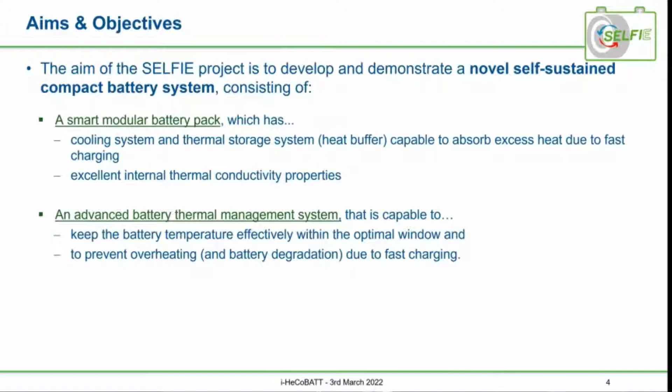So these are the aims, and the targeted results for industrialization are listed here. It has been divided into 4 parts, and there are 2 major points which are very relevant for EV growth: one is user acceptance, and second is EV market penetration. The 4 divided parts are very much related to these.

First is enabling fast charging up to 5C, which in our case will go up to 140 kilowatts of charge power, reducing the charging time to 10 minutes - that is almost 2 to 3 times faster than today for a 30 kilowatt-hour battery pack.

This will be achieved by developing a battery system capable of effectively absorbing excess heat during fast charging. This will also allow us to enable long-range driving by employing a battery pack capable of handling charging powers up to 140 kilowatts, instead of the current 50-100 kilowatt range. The target is to have a long range in terms of 700 to 1,000 kilometers.

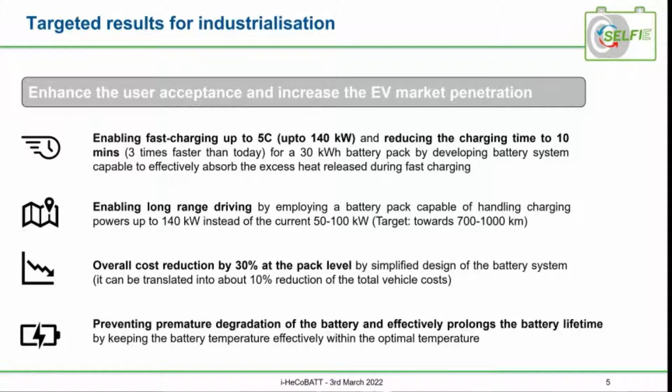Another aspect of the project is overall cost reduction by 30% at the pack level through simplified design of the battery system, which can be translated into a 10% reduction of the total vehicle cost. The fourth aspect is preventing premature degradation of the battery and prolonging battery lifetime by keeping the battery temperature effectively within the optimum range during fast charging as well as during driving.

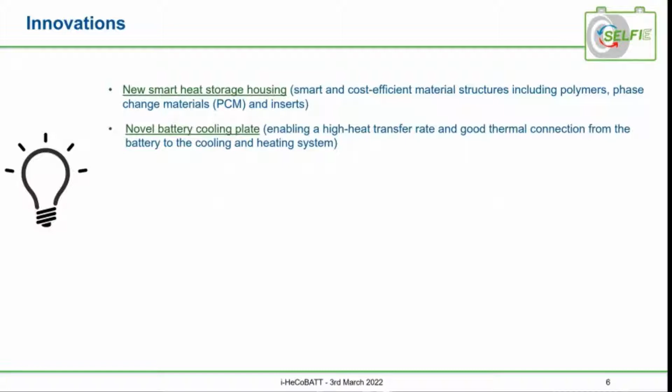So what are the innovations in the SELFIE project? First is a new smart heat storage housing, dealing with smart and cost-efficient material structures including polymers, phase change material, and inserts. Second is a novel battery cooling plate, which enables high heat transfer rate and good thermal connection from the battery to the cooling and heating system. Third is a novel PCM heat buffer dedicated for fast charging, integrated in the body of the vehicle.

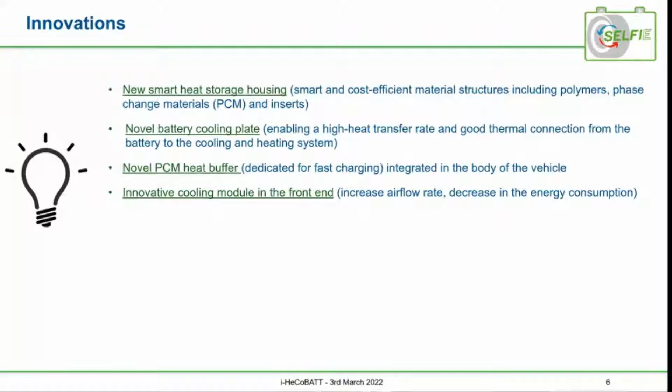Innovative cooling module in the front end. This is from the aspect of increasing the airflow rate and decreasing the energy consumption. And development of a cold storage device that will allow us to increase the power of the air conditioning system during fast charging and increase the system efficiency. And finally, we have done the virtual safety validation with hazard and operability study and risk assessment.

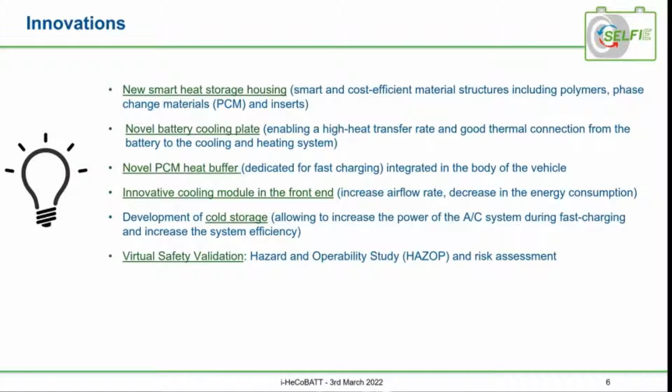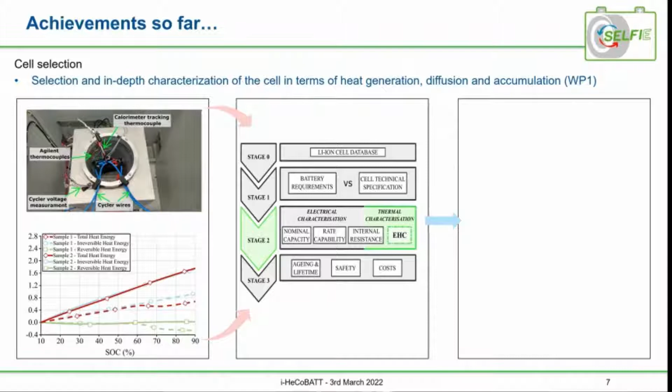So what are the achievements so far? We have done in-depth characterization of various cells in terms of heat generation, diffusion, and accumulation. And then we have done it in a calorimeter to check what is the performance of the cell, and we have compared it. And after that, we did a selection.

We had some selection criteria based on the battery requirements versus the cell technical specification and testing. We did electrical characterization as well as thermal characterization based on nominal capacity, rate capability, and internal resistance. And in the last stage, we did testing for aging and lifetime and safety and cost as well. And we concluded that for our project, the Toshiba 23 ampere-hour LTO cell would be the best.

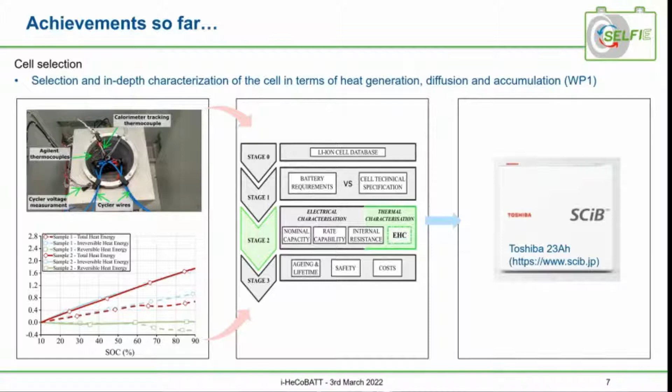We have developed a thermal management system, and it started with design and then prototyping of the component system for battery thermal management. It has been divided into two parts. The first group deals with the battery pack assembling and housing, which is responsible for single battery cell testing, the prismatic LTO Toshiba 23 ampere-hour cell, then the battery module. The module consists of a number of cells forming a thermally independent unit.

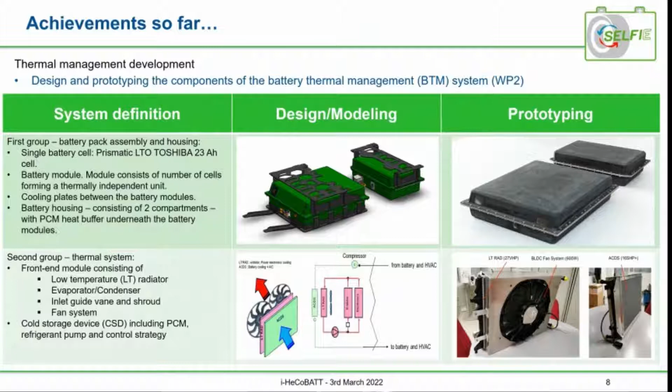Again, work package 3 here, which deals with the second part of the thermal management system, is divided into 3 parts. The first part is system development, which is the development of an efficient refrigeration system or loop development, then optimization of the battery thermal module or pack platform, and then packaging constraints for the thermal management system.

I just want to point out here that the SELFIE project is actually converting an IC engine vehicle into a BEV, so we have space constraints and weight constraints. So from that aspect, battery pack assembly and refrigeration system development have a lot of constraints. It needs to be optimized to the specific case.

The second part deals with the cold storage device. The prototype is ongoing; we have developed the first prototype, then we tested it, and for higher efficiencies we are upgrading it, and it has been tested for structural integrity and thermal performance as well. And the third point deals with system control development, which is an ongoing activity for optimization and reduction of cooling power.

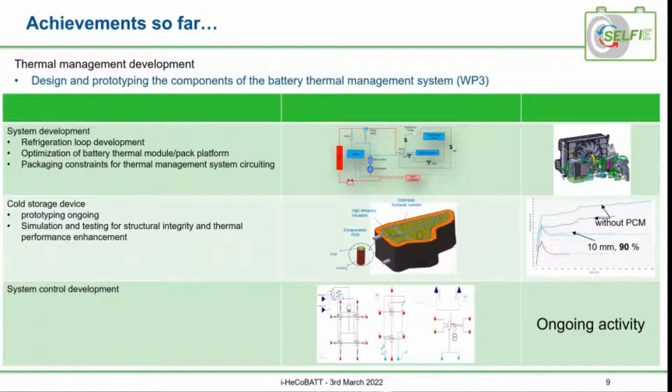One of the aspects of the project was to study the thermal, electrical, and mechanical characterization at the module level. So we did an experimental setup for a module, and then we tested it, and we achieved a result which shows that thermal management is efficient at 4C fast charge. It can keep the temperatures below 35, which in our case was around 32.

And then we also did a computational study. We developed a model, we validated it, and then we optimized it. And these changes will be integrated at the pack system level. And here at the left corner, we can see the radar chart, which compares natural convection, only PCM cooling, and PCM and liquid hybrid cooling. In our case, the module is cooled by cooling channels sideways, and a PCM plate is at the bottom.

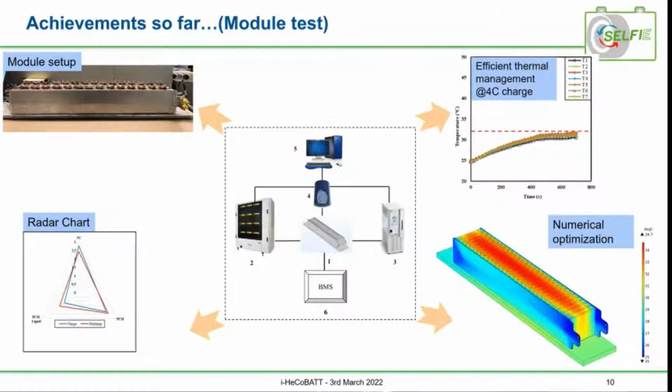Regarding the actual vehicle integration, this process is ongoing. For the testing and performance checking, we have already conducted a comprehensive test on a baseline vehicle, Nissan eNV200, which is an electric vehicle, and we have conducted extensive cabin cooling demand and performance testing, as well as cabin heating demand and performance testing.

And once in the demo vehicle, the Fiat Doblo, the battery will be integrated as well as the efficient thermal management system, the results will be compared and checked: what is the update, what is the increase, how much increased efficiency we can get in terms of performance.

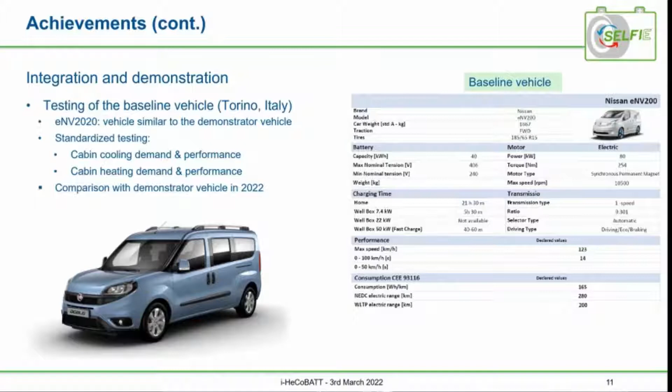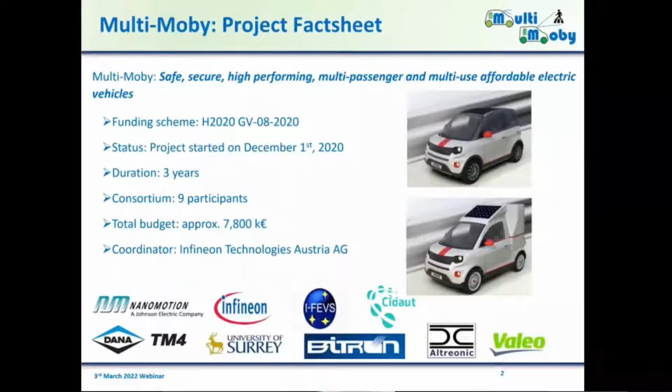The target of the project is to implement safe, secure, high-performing, multi-passenger and multi-use affordable electric vehicles. In particular, you can see some initial renderings of these urban electric vehicles for the transportation of passengers and goods that we included in the project proposal.

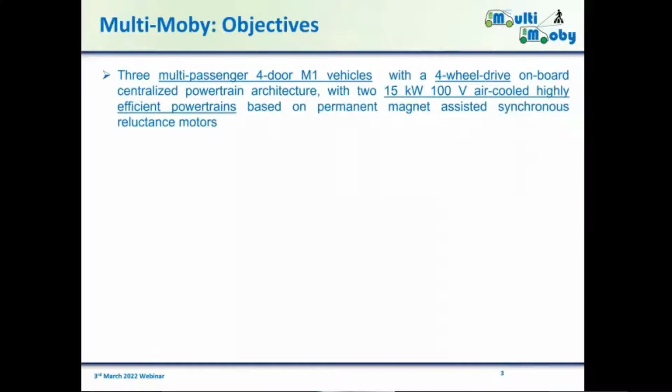In particular, the target of the project is to implement a small fleet of vehicles, in particular 3 multi-passenger 4-door M1 vehicles with a 4-wheel drive on-board centralized powertrain architecture. So the motors are actually installed on the sprung mass of the vehicle, the vehicle body, with 2 15 kilowatt 100 volt air-cooled high-efficiency powertrains using permanent magnet assisted synchronous reluctance motors, so motors with low content of permanent magnets. And then the project is also developing another 3 vehicles that are multi-purpose vans.

In terms of homologation categories, one of them is under the category L7E CU. It will be 4-wheel drive with 7.5 kilowatt 48 volt air-cooled powertrains, including a low-cost belt-based transmission system developed by Valeo, that is one of the participants of the project. And then the multipurpose vans also include 2 vehicles that are under the category N1.

Also, these vehicles are 4-wheel drive, one with 2 15 kilowatt 100 volt air-cooled powertrains developed by Dana TM4, that is one of the consortium participants, and the second one with 2 15 kilowatt 48 volt liquid-cooled powertrains, again developed by Valeo. One of these vehicles will be for the transport of general goods, while the other 2 vehicles will target the delivery of food.

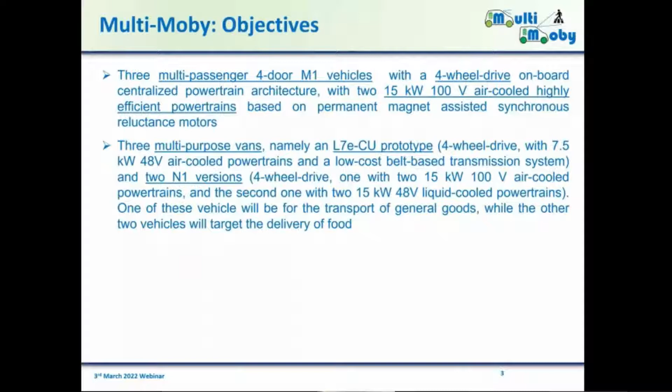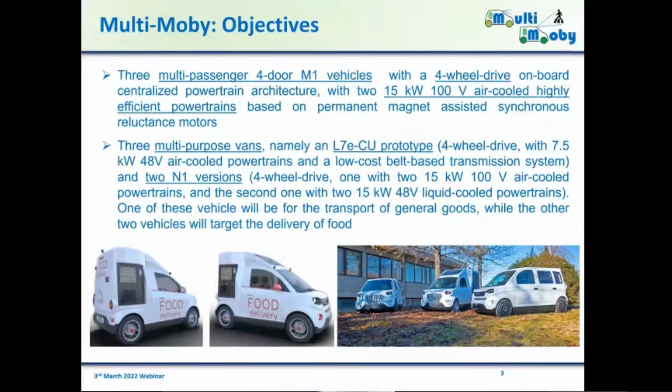Here you can see some initial CAD models of the vehicles that we put together in the initial phases of the project, but now, despite we are still in the first half of the project execution, there are already the initial prototypes of these vehicles that are available for preliminary assessment.

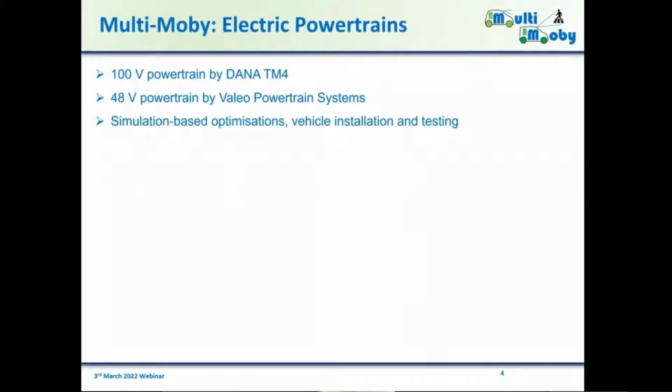During the project, there are simulation-based optimization activities, for example, in order to optimize the geometry of the rotor of the electric machines, but there is also significant testing activity on test rigs as well as directly on the preliminary versions of the vehicle demonstrators.

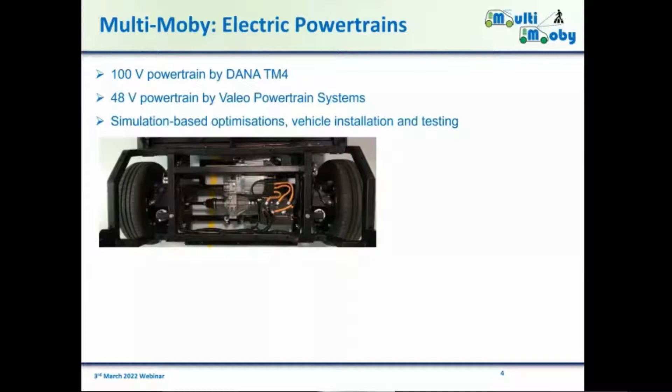For example, here you can see the Dana TM4 electric powertrain installed on the initial vehicle prototype. You can see also some of the components in terms of motor and inverter that have been developed by Valeo Powertrain Systems. It is possible to see the mule, the chassis with the powertrain that is being tested at the rolling road facility available at the participant IFEVS, that is actually the vehicle integrator within this project.

And also we have carried out some testing on a test track in order to assess the drivability and also to fine-tune some of the controllers that are being implemented for the operation of these light urban electric vehicles.

One of the main features of these MULTI-MOBY vehicles is safety. Safety means, first of all, passive safety. In particular, one of the participants of MULTI-MOBY, that is CIDAUT from Spain, has been responsible for the optimization of the high-strength steel structure of the vehicle chassis with a high energy absorption capability and very high stiffness.

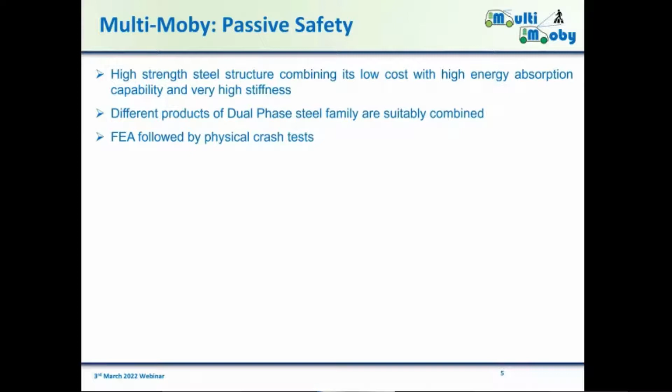This chassis includes different products of the dual-phase steel family, and it has been designed through the combination of finite element analysis followed by physical crash tests. So here we can see some of the models for simulating crash scenarios that have been developed by CIDAUT for the consortium. And then in these photographs, we can see examples of crash tests that have been physically implemented in December last year at the CIDAUT facilities in order to assess the passive safety performance of the vehicle.

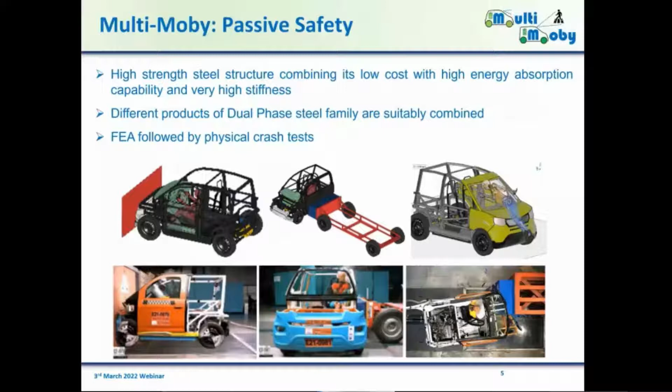MULTI-MOBY also includes consideration of some innovations in terms of active safety performance of the vehicles. In particular, the target is to enhance the active safety of the vehicle through simple, cost-effective solutions, including consideration of vehicle connectivity and partial driving automation.

So, for example, a typical scenario that is addressed by MULTI-MOBY is the scenario in which, because of an evaluation error of the human driver or the semi-automated driving system, the vehicle enters a corner at excessively high speed. In a conventional human-driven vehicle, even if the ESP intervenes within the corner to stabilize the vehicle so that it doesn't spin or develop a high value of sideslip angle, the vehicle will not be able to follow the desired trajectory, with potential risks in terms of road safety.

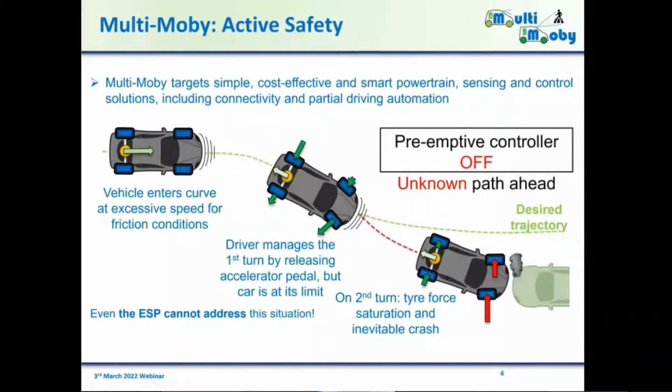So the idea of MULTI-MOBY is to benefit from the fact that nowadays vehicles are characterized by the infotainment navigation system that can allow to know the current position of the vehicle. So by knowing the position of the vehicle and the expected curvature of the road ahead, it is possible to preemptively slow down the vehicle if we see that it is going to enter a corner at excessively high speed. So this is the concept of the so-called preemptive braking controller that has been implemented within MULTI-MOBY.

So essentially, it doesn't need a complex actuation because it is only a matter of reducing the torque demand independently from the driver input and possibly implementing a pressure level on the four calipers of the vehicle, but it doesn't need independent actuation of, for example, the friction brakes. It doesn't need any more complex chassis actuator than a conventional production passenger car.

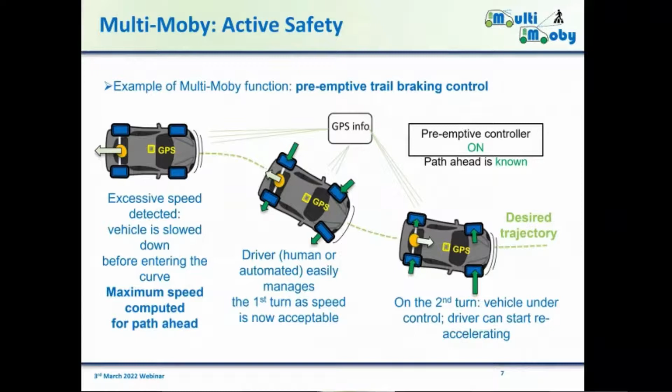Essentially the idea is to slow down the vehicle preemptively by using some form of predictive control if the vehicle speed is excessively high with respect to the trajectory ahead. We have carried out an extensive simulation activity in order to assess this functionality in the first part of the project, and despite being still in the first half of the project, we have also been carrying out some preliminary tests of this preemptive braking control functionality.

For example, we have implemented this preemptive braking control functionality in the form of different controller formulations at different levels of complexity within MULTI-MOBY. The most basic implementation is called preemptive rule-based trail braking controller, and then we have two nonlinear model predictive controller implementations of this preemptive braking control function that are at a higher complexity level.

But essentially, a typical example of operation of this controller is in a U-turn maneuver. So X and Y represent the coordinates of the area where the vehicle is moving. The passive vehicle is accelerated by the human driver. The human driver tries to make the vehicle follow the reference trajectory by steering, but as the vehicle speed is excessively high, the vehicle is not capable, without the preemptive braking control function, to follow the expected trajectory.

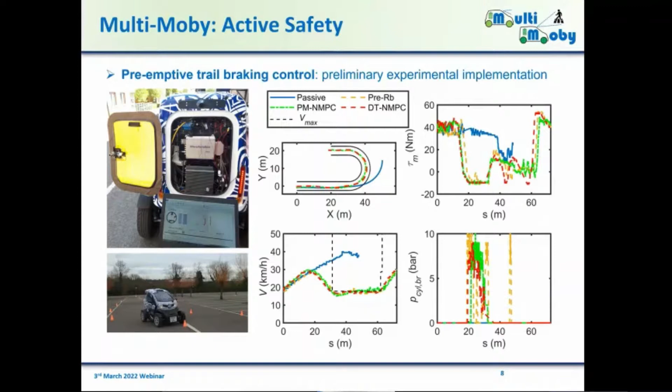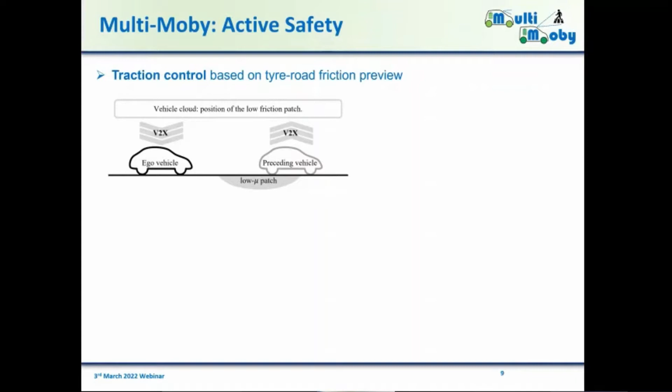Another concept that we are testing in MULTI-MOBY is, for example, to augment the traction control function of the vehicle that prevents wheel spinning in acceleration conditions by using tire-road friction preview. So the idea is that with vehicle connectivity, it is possible to know potentially in advance the presence of low friction patches on the road. And as a consequence, we can integrate this map of the future friction conditions of the road within the traction controller of the vehicle that reduces the torque demand of the electric powertrains when there is a risk of wheel spinning.

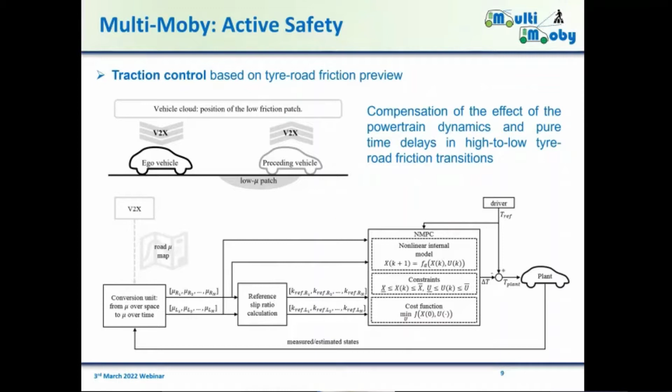And the benefit of this road preview functionality is that we can preemptively reduce the powertrain torque before the wheel reaches the low friction patch in such a way that, despite conventional electric powertrains being characterized by significant actuation delays, we don't have any safety issue in terms of vehicle dynamics when the vehicle travels on low mu patches. And again, also for this functionality, we have already carried out some preliminary experimental testing.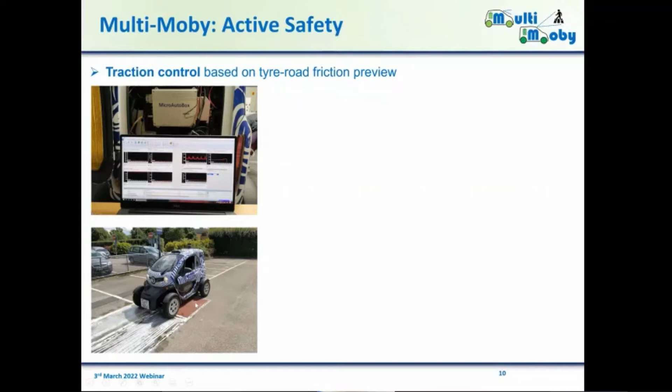because of the powertrain actuation dynamics, whilst for the case of the controller with the benefit of V2X connectivity, so by knowing in advance the variation of the tire-road friction condition, it is possible to significantly limit the slip ratio of the driving tire after the transition from high to low friction. And this is only an example of preliminary testing.

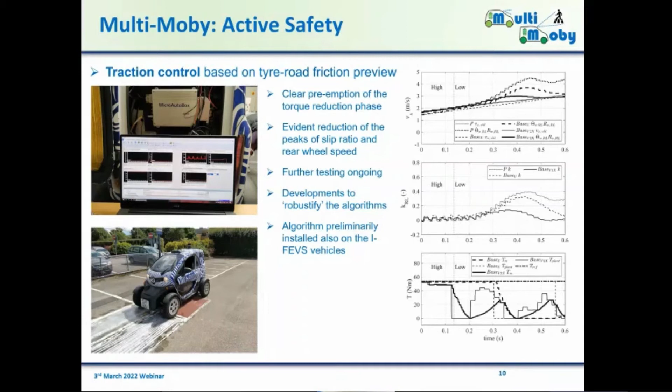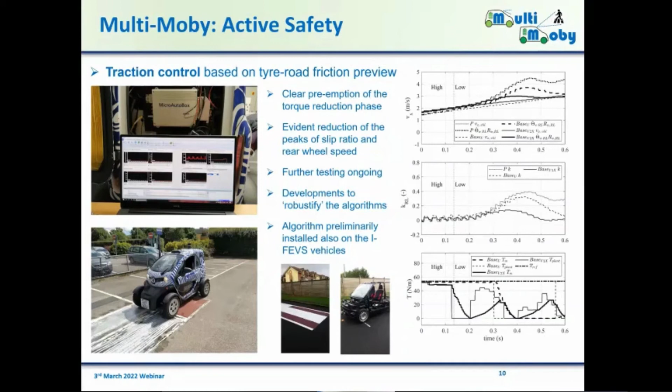Now we are carrying out further activity to robustify the algorithms, and we are also testing them on the MULTI-MOBY vehicle prototypes prepared by the participants. So we also published a journal paper describing the details of this activity. So I hope that with this short presentation I provided a flavor of what we are doing within MULTI-MOBY.